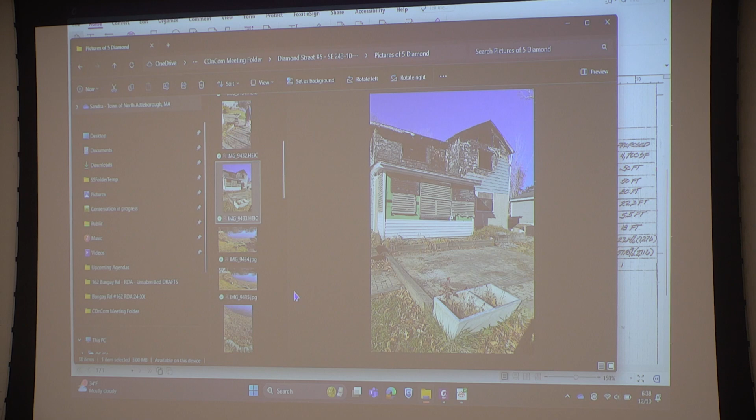Are you planning on demoing and then rebuilding, not a partial demo, partial rebuild? Where are you planning on stockpiling materials? It seems like most of the material, they will excavate the perimeter to put foundation walls in. Most of the material will have to be stockpiled in the middle of the basement until it's time to backfill, at which point they'll work from the inside to backfill outside the foundation with the stockpile, and the surplus will be removed from the site.

And then the last question I had, and I don't think there are any, but is there any tree removal being proposed on this site? No. Okay, that's all I had.

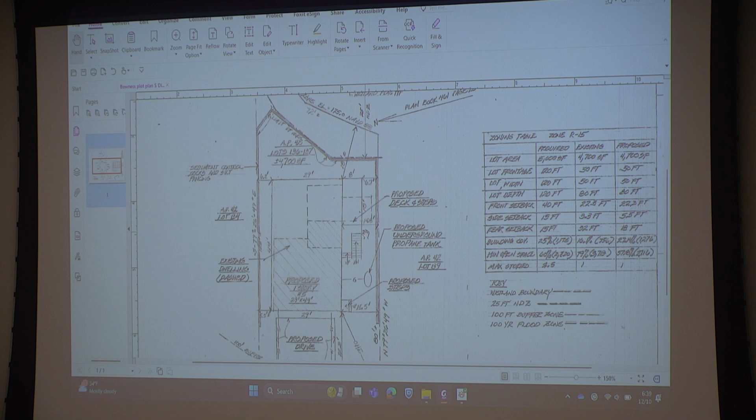I'll open it up to the commission to see if anybody else has questions, starting with Deb. I'm all set, thanks. Jill? I'm good. Anything from you, Sandra? I don't mean to put you on the spot.

No, I went out there and took a look, took pictures with Mr. Bowman. Everything looked okay. It was just the erosion control that he had put in after the fire, just to protect from anything getting into the water. It had encroached into the ground a little bit, so they had to remove it. He had the flags there, so it was looking good.

He did mention, though, that underneath the patio is the old septic system, so that's going to be removed, I believe, and they're going to fix that, since by the end of this they'll be connected to town sewer now. Okay, got it.

So it sounds like nobody has any major concerns or comments. I will see if anyone has any comments or questions from the public. Seeing nobody, so I don't think we have a DEP file number for this project yet.

So we are going to have to continue the public hearing until we have that file number. I would anticipate it probably at the next meeting, and I think it'll be more of a procedural closing of the public hearing and issuing the order of conditions, so you don't need to be here for that. It's just that we can't close the actual application until we have that file number. I did talk to them at DEP, but I would imagine it's moving a little slowly with the holidays.

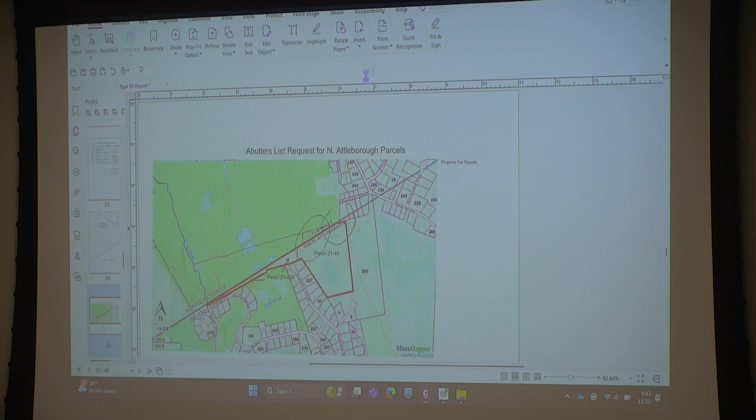So the property is located just on the town line with Plainville. It shares common ownership with Heather Hill Country Club. This is part of a larger delineation that occurred on Heather Hill Country Club and continued into North Attleboro onto these two parcels, also owned by the owner of Heather Hill Country Club. This is limited to these two parcels in North Attleboro.

So with that image, you can see the outline of the property. It's oddly configured—there's a large portion and then a long, narrow sliver. That long, narrow sliver is lot 433. The other one is lot 45, which is a larger, rectangular parcel.

There are undeveloped parcels, with bordering vegetated wetlands on the property. There are also three streams that flow south from Heather Hill Country Club and cross the narrow sliver portion, including the furthest west one, right along the Plainville line—that's Scotts Brook. Scotts Brook flows along the westerly property line, and the other two streams flow from the chain of ponds in the middle of Heather Hill across the site. There's a bordering vegetated wetland within that area, which we delineated, and which also contains an intermittent stream flowing to the east.

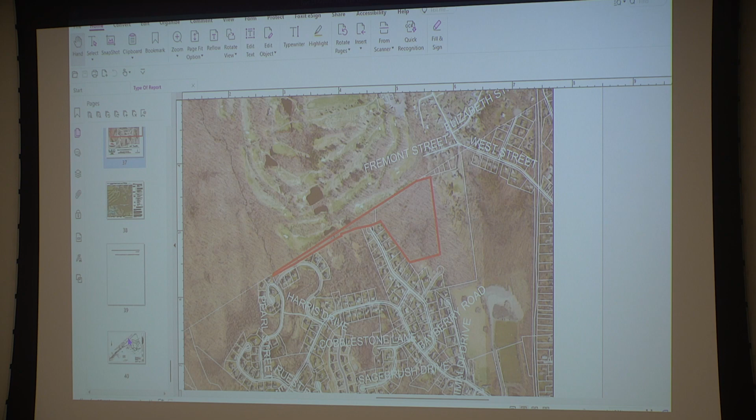So hopefully you're oriented now. If you don't mind, putting up the site plan will allow everyone to see where the wetlands are and the wetland flag numbers.

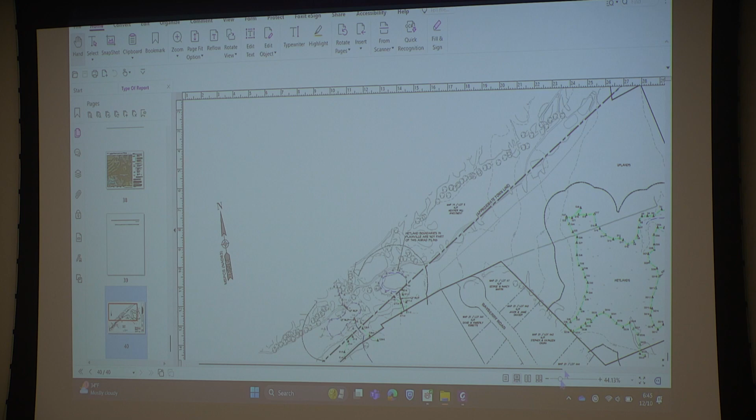So there's a long history here with this stream system. Back in 2008, there was a determination of applicability that was appealed for Scotts Brook and these streams. This occurred in North Attleboro, and it went to an adjudicatory hearing with DEP. DEP ended up issuing an administrative law decision on the status of the streams based on extensive expert testimony regarding the entire watershed, and found that Scotts Brook and these streams were all intermittent, except for one portion of Scotts Brook, which is way up in Plainville.

In 2017, the Plainville Conservation Commission reviewed the streams in Plainville and found them to be intermittent, similar to that decision. So there's a procedural history of intense analysis of these streams, and we're simply seeking to reaffirm those findings with this application. It's limited to these short segments of stream that cross this very narrow piece of property. It's unusual in that regard, but in the interest of being thorough with our delineation, we wanted to reestablish the determination for these streams, as well as the BVW.

The BVW flags are in green. That was field delineated by LEC. I understand the commission is contemplating hiring a peer reviewer to review this, which is fine with us. We're prepared to engage the peer reviewer and go through that process. And that's the presentation—I'll answer any questions you have.

Great. I think you answered my only questions—those were sort of the status of those streams. I did notice, if you could, this is the only sheet, correct? Correct, for the plans.

So when I had taken a look at the boundary of the parcel in relation to, I don't know what that street is down there that curves to the left, bottom left—oh, this one here? Nope, bottom left. Actually, this part of the drawing is not shown here. There it is, that's the rest of it. Okay, Harris Drive. Scotts Brook is at the very far end of the parcel, just at the—there, like almost where that rotary kicks in? Exactly.

So, you're saying in 2008 it was reviewed and they were all determined to be intermittent, and then again in 2017 the town of Plainville independently reviewed that? Yeah, there was a development slated for Heather Hill Country Club back then. There was an ANRAD filed for the entire property. The Plainville Conservation Commission hired a peer reviewer to peer review the findings. Eventually they obtained observations of the streams dry during a non-drought period, which is the criteria to overcome the presumption that it's perennial. And so they issued an ORAD specifically finding that all of those streams were intermittent.

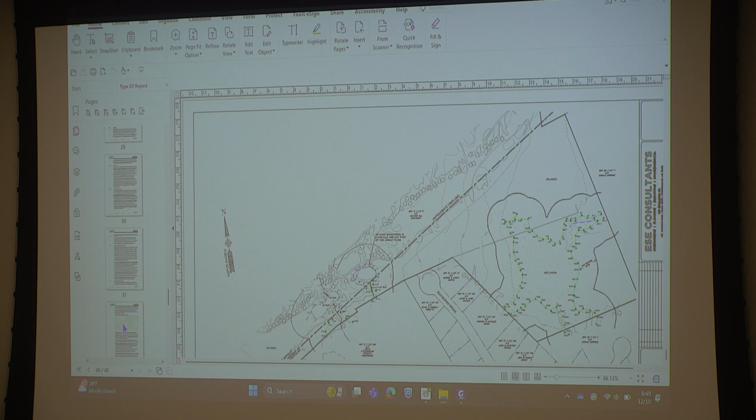Not this one, right? No, scroll up please. See what page it's at. I think I'm at the end here. Yeah, keep going that way. There it is, on page 30. This one here? Yes. Are you able to zoom into that at all?

This doesn't show the property lines, but Scotts Brook is on the far left of the site, and it runs parallel to Harris Drive there, so you can kind of see how they interconnect off-site.

And is that a pond, is that a natural pond, or is that a detention basin or something? Don't know. It's a couple hundred feet at least from the site, so we didn't evaluate that.

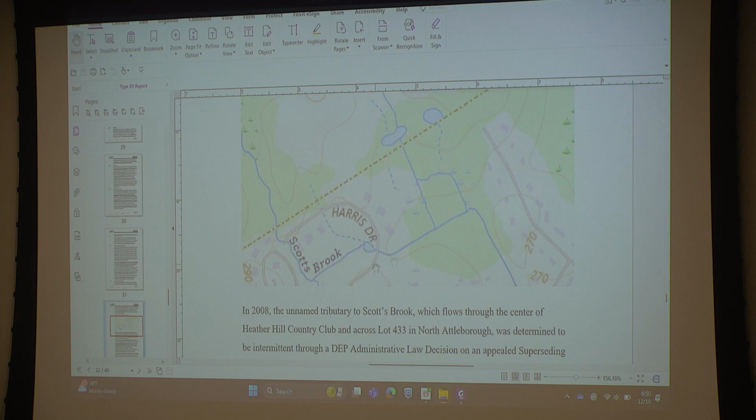Okay, I do not have any other questions. I'll open it up to commission members to see if anybody else has questions. I'll start with Brian. Sorry, I came in a little late, I commuted from Worcester, but I'm all set for right now. Thank you very much. Deb? Yeah, I'm all set for review. Okay, Joe? I'm all set for now. Lindsay?

So yeah, like you said, I think we're entertaining the motion. It will be later in our agenda to approve the peer review fee at the consent of the applicant. So as long as you're okay with that, we can't close this without a DEP file number anyway. So as long as the applicant is amenable to the peer review fee, we'll get that in motion in the next couple weeks with Sandra.

And you, I don't know if it would be you or somebody else from your staff, if you want to accompany them out there. That's sort of the process, it's not necessary, but they can. Are the flags visible? They are, yeah. They're there and visible, so they can do their own thing and report back to us, and if it's necessary to meet out there to iron out differences, we can do that.

All right, so I will see if anybody wishes to comment from the public before making a motion. Seeing nobody, okay. I would say January 21st, because of the peer review field visit. Is that okay, the January 21st hearing? Yeah, I think that's reality, it's not going to be done by January 7th. Hopefully we don't get snow, because that'll be difficult. Yeah, it is what it is.

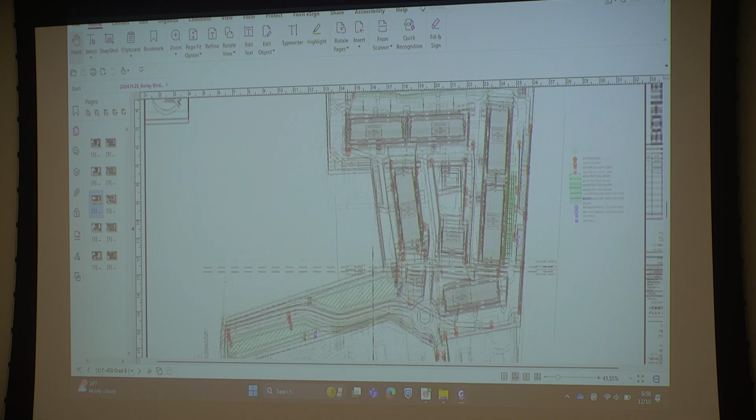Okay, and then the next page just talks about erosion control. These are all part of the normal plans—we have a full erosion control plan and also a full landscaping plan. I included them with the slides here in case you want to go into them. The next sheet blows up, so we have proposed landscaping and seed mix in that bioretention area.

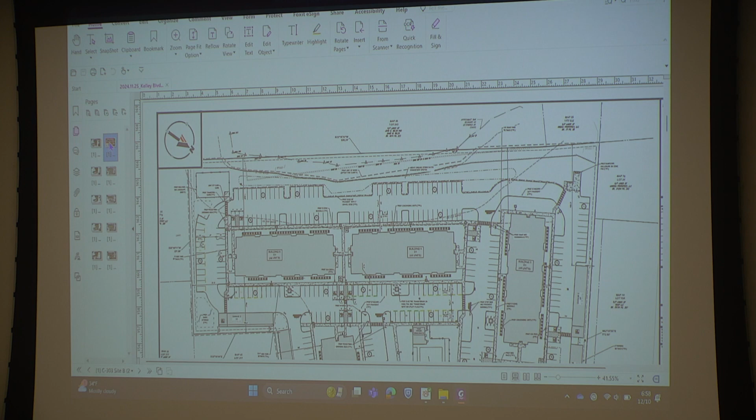And then the other thing to note, as part of the submission, we have a full operation and maintenance plan, which talks about the required maintenance and how often everything will be visually observed and maintained, following the state mandates. Also want to note, if you may be aware, we're already in the planning board process.

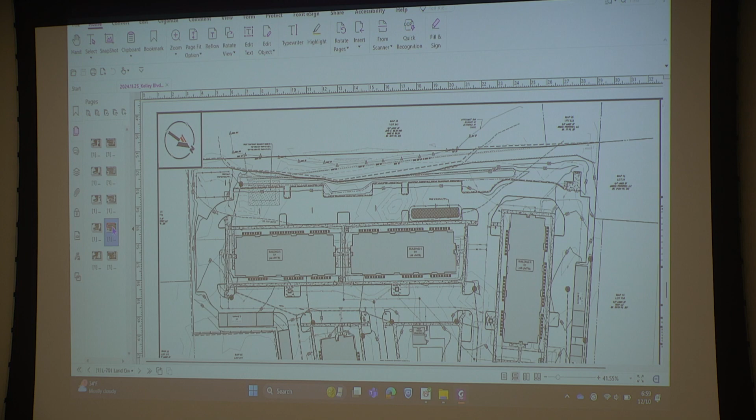We've had 3, 4 meetings, and we're going to have more. They actually have a peer reviewer that's reviewing these plans and the stormwater report that I submitted to you already, and we're hoping to get their comments back this week. We haven't heard from Gil yet, from the planning department, but that was supposedly going to be turned around in 2 weeks.

The peer reviewer, Beals and Thomas, will also be CC'ing the Conservation Commission on that. So they are reviewing the full plan set and the full stormwater report. That's all I had, unless you had any questions.

I know some questions—you forwarded some questions that you had. Yeah, those came from me. I don't know if you want to run through those. Yeah, that's fine.

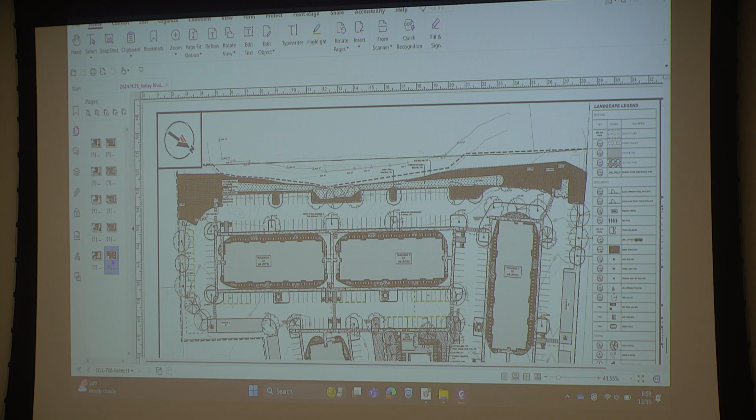I think for me, my major comment was going to be to have the stormwater report and drainage calcs peer reviewed. It's so nuanced with the calculations and stuff—like I know what I'm looking at, but not with enough confidence for this board to sign off on it. So I'm glad that that's getting peer reviewed.

So yeah, I don't know if you had a chance to look at the comments that got sent over. They're relatively minor, some of them are just clarification questions. I don't know if we want to run through it sheet by sheet, and then I'll open it up to the rest of the commission, however you want to do it. Yep, that's great.

So I guess my first question was on C403. I think you've already said that no work is taking place in the 25-foot no-disturb zone. I just want clarification that there's going to be no clearing of that adjacent wooded area. Correct. So the idea is the tree line—it shows best on this plan—the limit of work, limit of disturbance, is the edge of the tree cut line, which is outside the 25 foot.

So it's basically at the extent of the grading—we have to grade to get the parking lot in that bioretention area. That's right where the erosion controls will be, at that tree cut line, and again that's all outside the 25 foot. And that tree line, I think I read in the report, or maybe it was the ANRAD or something.

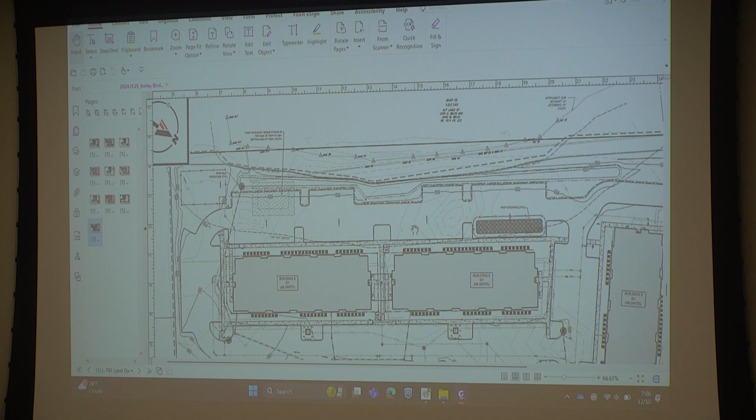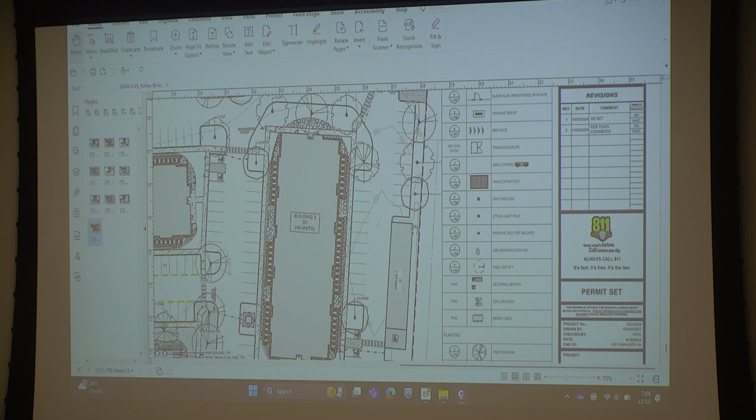My other couple of comments are on the landscaping plans, specifically on 703 and 705. There were a couple of non-native species proposed, so I recommended some native alternatives. I don't know if it would be you or if you have a landscape architect in-house to review that with and see if it's an amenable alternative. As soon as I got the comments, I forwarded them to the landscape architect, and he didn't think there was any issue with any of those.

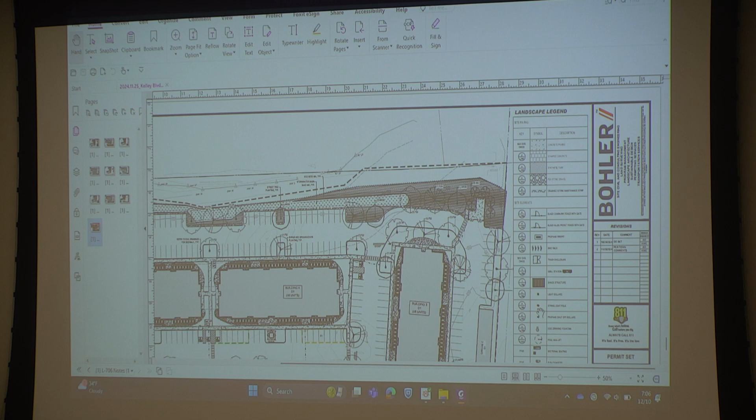Do you have a recommendation instead of—I'm going to butcher this Latin name—the fragrant sumac? There's a native sumac, but I don't know if you were going for ornamental value. The fragrant sumac is more of a shrub, and it turns red in the fall, so it has fairly high ornamental value. There's another type of sumac that looks more like a tree—it still turns red in the fall, but if you're going for more of that shrub look, I would probably not recommend the other sumac, and I would recommend a different shrub instead.

What is it, winged euonymus? Or burning bush, is it? That's invasive. No, that's invasive, do not—used to be... nope, it's invasive. All right, I'm sure he'll know. Blueberry, winterberry, I don't know, I was thinking blueberry's not gonna do well because of that. Blueberry's not, because it's wet. Depends on where. Winterberry is a wetland indicator.

What's the one that smells like vanilla? Sweet pepper bush, maybe? They have that proposed already, yeah. Sweet pepper bush is wonderful, smells like vanilla, very sweet in August. Yeah, I think it's sweet pepper bush.

The other sumac—if you want a sumac—is called staghorn sumac. But again, it looks more like a tree, so I would leave that up to the landscape architect. I'm not going to go back and forth about it, as long as it's native, that's fine—native and non-invasive, which, thank you for correcting me. Thank God I haven't recommended that.

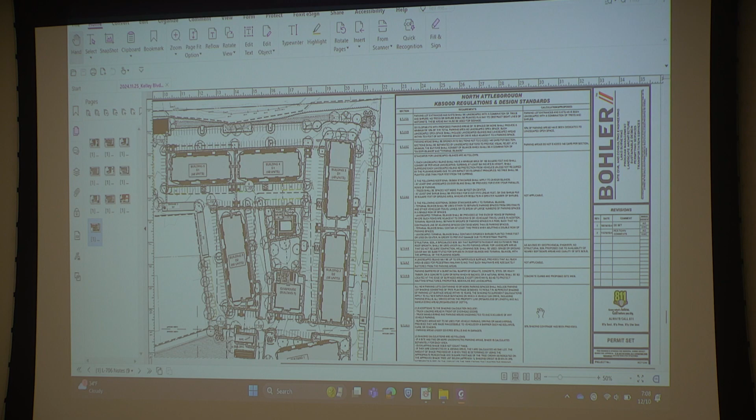I think the last comment I had on landscaping was just in terms of consistency. I noticed there were two different contractors for seed mixes. I would recommend going with one or the other as opposed to one here and one here, but I don't think that'll be an issue—I'll double check the availability of those seed mixes as well. Those were my only comments. Sounds like a lot, but I don't think it's anything major.

And I'll take a look at the comments from the peer reviewer on the stormwater report. But other than that, I'm all set. So I'll open it up and see if other members of the commission have comments.

Start with Brian. I'm all set, just my own curiosity, it's outside of our scope, but was 304 the initial proposal for the amount of units? I think there was more, or I didn't know if you could come down. Maybe we came down a little bit. Gotcha, because before there was a different plan. Yep, and the architecture was different, maybe that was like a year and a half ago. I think the units came down from that, but before there was like 3 buildings and they were kind of all outside the pool area. This is a totally different change, but I think the unit count actually came down a little bit. Okay, thank you.

It sounds like Jessica had everything covered, but I would say all native plantings for sure, and as much green area as you can fit in for the development, the better, as far as I'm concerned. And I'm going to just wait for the peer review. With the planning board, they had similar ideas, so we shifted some things to add some more green space, particularly around the pool area. Yeah, no, that's good.

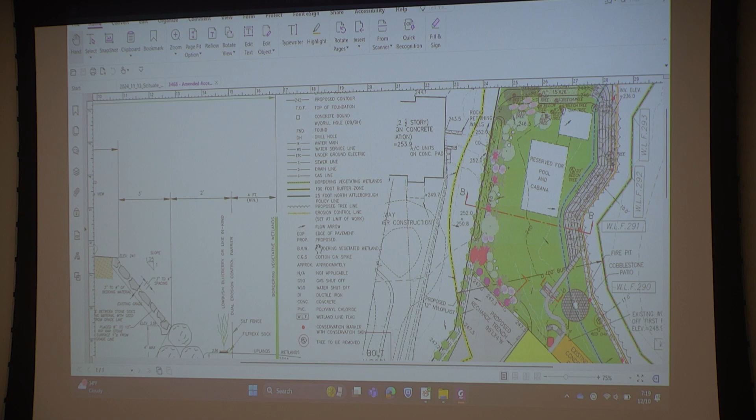I mean, to me, this seems like if I didn't even notice it, it should constitute a minor change. That's the request - where's the area we're talking about? There you go. I just couldn't see it. So you see how it goes gray here? Okay, so it kind of goes...

It kind of goes closer to that cobblestone patio, I guess. So it softens it this way, doesn't come out straight. Looks like it goes a little bit farther up the backyard too, the new one. So it kind of comes, maybe not like this, softens and goes like this.

Has it shifted at all? I don't know if this plan is... I think if you go back to this one, the original one - yeah, I think it might have shifted up a little bit. It looks like it shifted down actually, so if you see the red dot, the red sign - yeah, that one has shifted down. So the existing concrete patio comes right up against it now. Well, it did before, but it's different.

It's just two different people doing two different plans, because your plans are a little different than this, the landscape guy, SFC.

So with the wall that trailed back, they pulled back the rock slope a little bit, so you actually have a little more green area. This area here is the same as what you have on this area here.

Where's the staircase now? Is it still in the same spot? The one off the deck? Yeah, this one here by the patio. Oh, okay, so that's still gonna happen, right? They've just made this a little larger so you could see what's going on with the blocks. But it looks so drastically different that Tyler wasn't too sure, and he flagged it before he left.

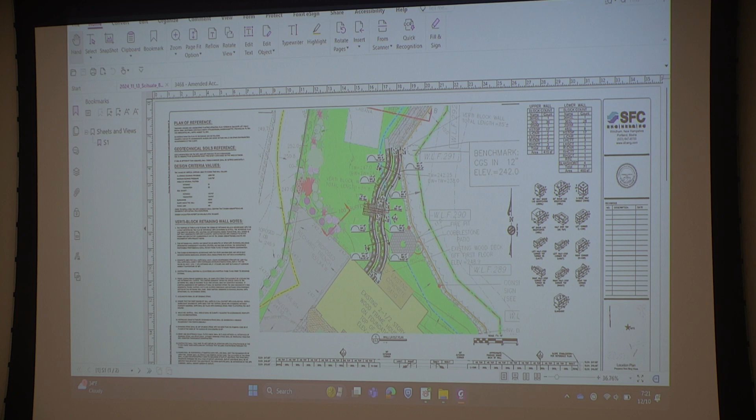What are the little humps going regularly? This one here, like section A, section B? Oh, so on this structural engineer's plan, those are the section As, and they tell you the radius, like it's 16.6 inches for the blocks. Yeah, they just tell you.

I mean, I think this qualifies as a minor modification. I don't think this needs to be considered an amended order of conditions where you have to appear before us at a public hearing again. I think the change is very, very minor. I think we already allowed the encroachment into the 25-foot, and I don't think this is really gonna adversely affect that more.

Those are my thoughts. I'll start with Brian. I'd like to echo what you say. I did the site visit with Tyler back - I think it was September, I forget now, it's been a while. But yeah, I mean, personally I see that as a very minor change. So yeah, I have nothing else.

Deb? The blue dotted line is the 25-foot? Correct, yes. Could you go back to the old one again? So it's essentially 2 blocks instead of 1. Yeah, that's gonna be in it. It softens here, doesn't, it's not as rigid. So it kind of softens around here. No, I think it's a minor modification change. I'm fine with it.

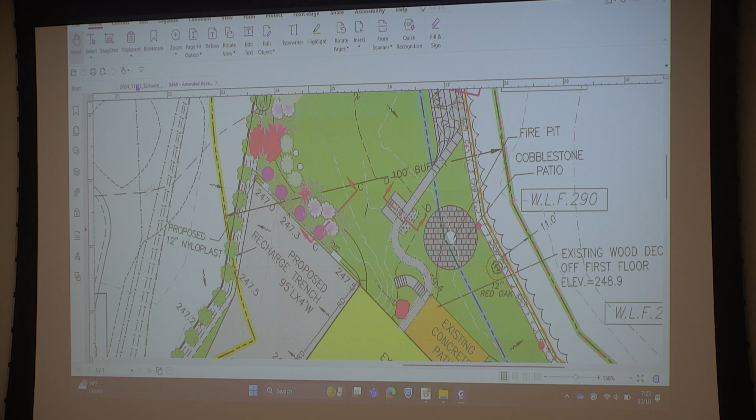Okay, Jill? My question would be, the line of shrubs that we have, I'd probably say 11 feet off the wetland line - in the updated plan it looks like the patio might encroach into some of those planting locations. I was wondering if this removes any of those, or if any of them have to be shifted. Yeah, we'll make sure the patio's out of that zone.

So they're still gonna be planted? Correct, as long as there's no planting change. Oh, so is the patio moved farther to the south? It's moved a little bit south, probably by like 8 to 10 feet. Yeah, right around there.

Plants are still there? I'm good. I recuse myself from this hearing.

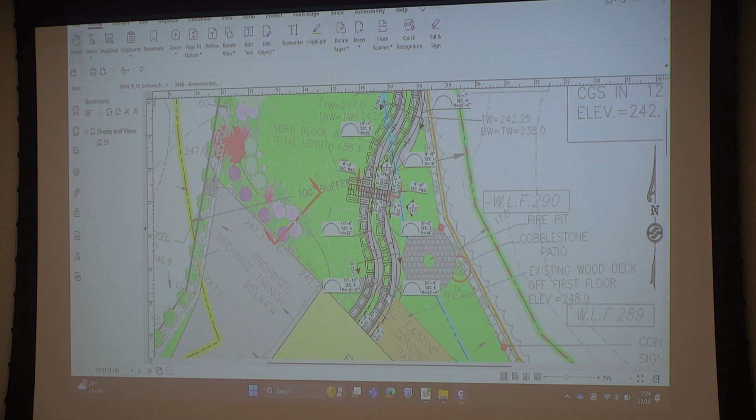Okay, so it sounds like we're all in favor, minus Cliff who's recusing himself, on this being a minor modification, with the understanding that we note in the file, Sandra, that when we get the as-built we make sure those plantings adjacent to the patio are there. Other than that, I will make a motion to approve the minor modification to the retaining wall at 41 Bryan Drive, Daniel and Jennifer Wilson, SE number 2430978. So moved. Second. Motion and a second.

All those in favor? Aye. All those opposed? Abstain? Recused? Thank you.

That concludes commission business. Moving on to other business, we have one set of minutes from 11/26. I took a look, they're fine. I had one quick update for you after your minutes, if you want to do the minutes first. I took a look at the minutes, I think they're fine, I didn't have any changes. I don't know if anybody else has changes or thoughts.

All right, I will make a motion to approve the minutes from 11/26/2024. So moved. Motion and a second. All those in favor? Aye. All those opposed?